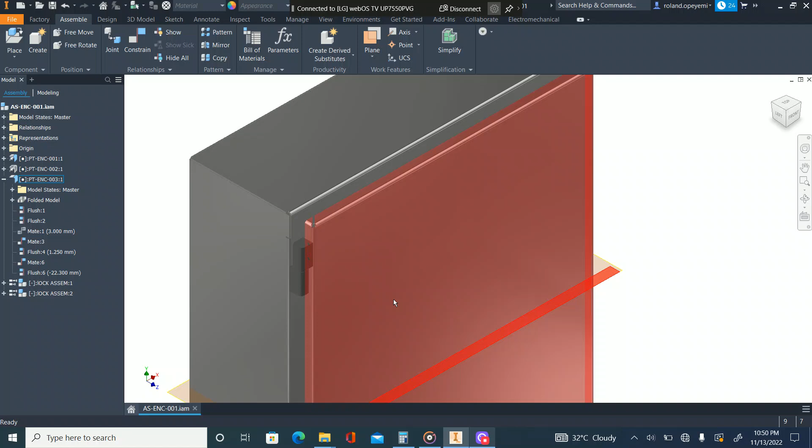The initial dimension we had, by the time I put the hinge, it was shooting out a bit, so I had to make adjustments on the main body, on the flange of the main body, to bring it further in. I'm going to measure from the end of the flange - this is about 1.5mm, 1.25mm, to make room for my choice of hinge.

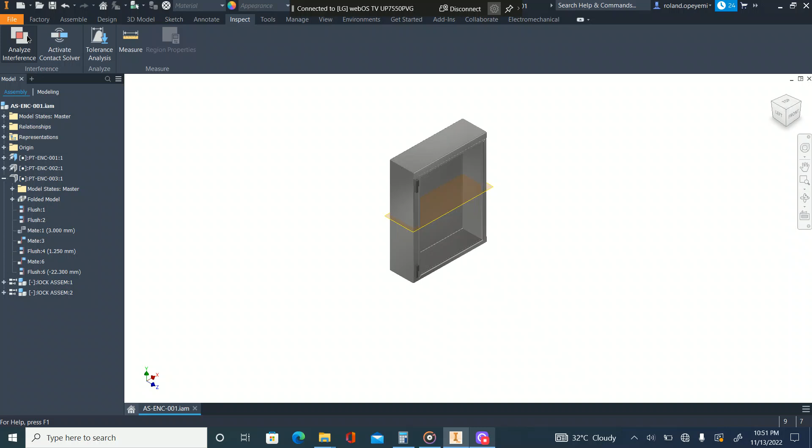Another thing we do most times is check if things clash. So to avoid clashing, we might need to make those tolerances, and that's what we did. There was no interference between the main body and the hinge and everything else, so this worked perfectly.

So I'm going to show you what changes are done. Let me just do save as for this assembly and delete what I've done, then save as 002. Alright, so this is it.

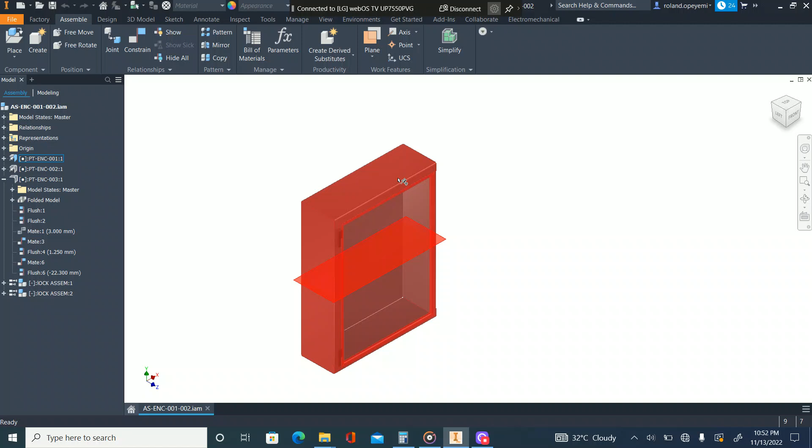So I've done the save as. Always save this and come back. So what I did was, when I want to open the main body, you're gonna see - whatever you've done so far with the previous videos is fine.

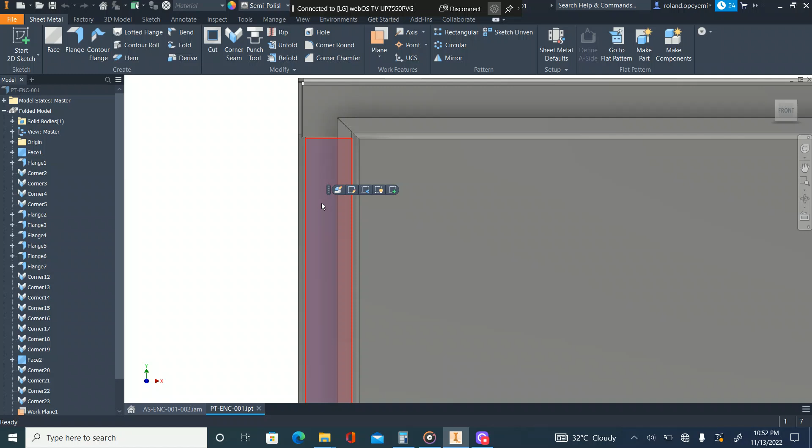The changes we've done to the main body, since we need to extend this further, I'd gone to make those changes there. So this is what I did.

I have a flange that needs to move further, so it means I need to change the flange depth of this by 3.25 - it was 30. Yeah, 3.25, because that was the clearance I had on the edge of the enclosure.

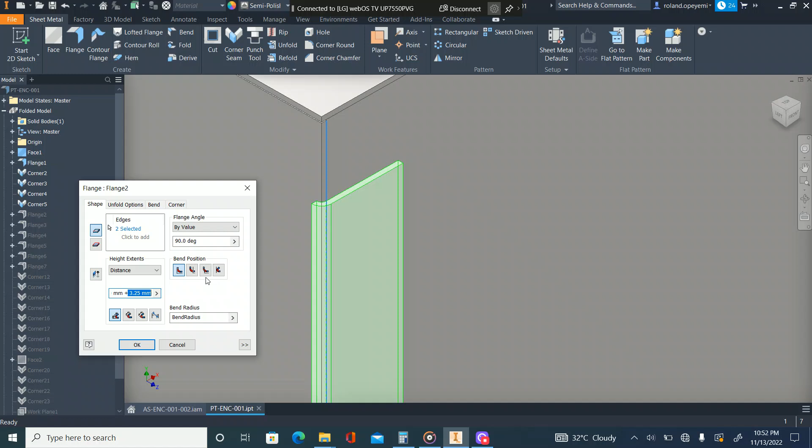So if you look at this part in your drawing, go to this main body, put 3.25. That's because I want the edge of the hinge isolated to flush with the edge of the enclosure.

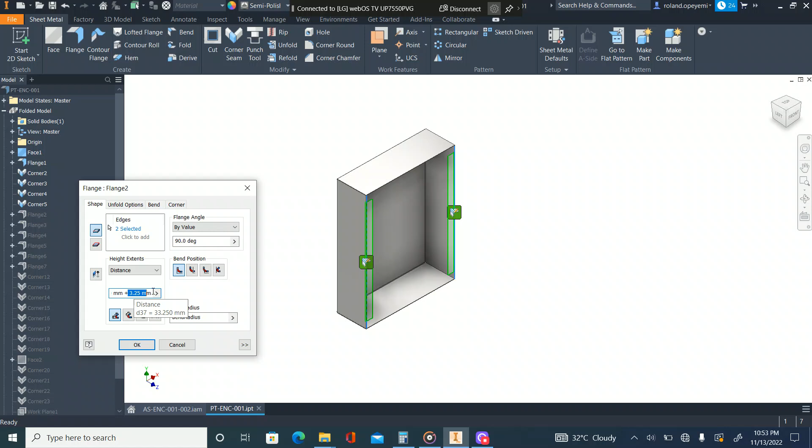So in your own, you go to 3.25, add the 30 plus 3.25, and if you come over here, I've done some things on this part.

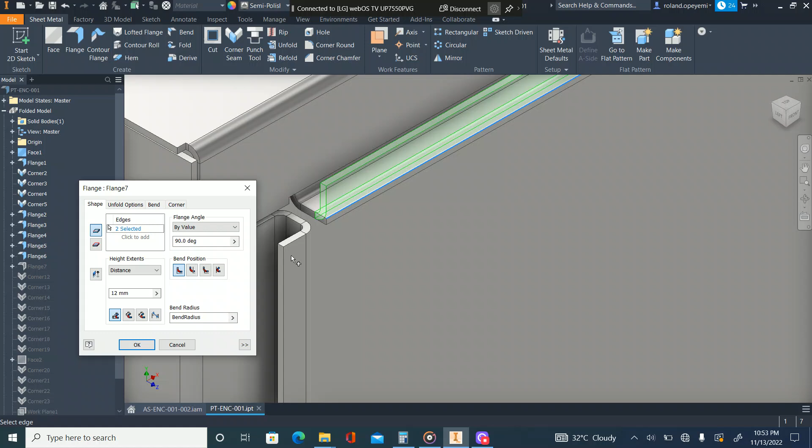So on this part, increase by 3.25. Then on this part - let me go out. On this part of the drawing of the flange, this one here, the second one is 1, 2, 3. So the second flange, or the top.

Having moved in by 3.25, it means that these are moving by 3.25 to the right and to the left. I mean both sides - to the right, my right, and this is moving in by 3.25.

Meaning that the offset we've created here, it was 30 before. So what I did was, if you hover over it, it immediately says d37, which is equivalent to the length of the flange. If you look at it, it's going to give us 33.25, which is 30 plus 3.25.

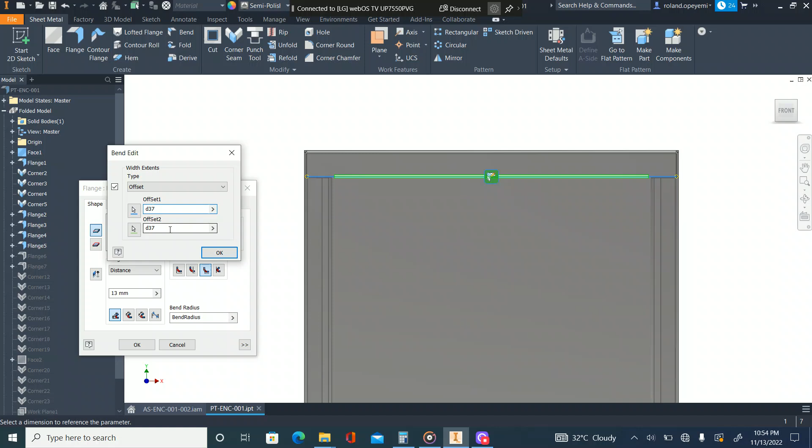So you can either write 30 plus 3.25 as it was before, or you link it to it so that whenever there are any changes on this edge, it automatically does the offset by itself and respects the tolerance we give it. So I connected it with the parameter.

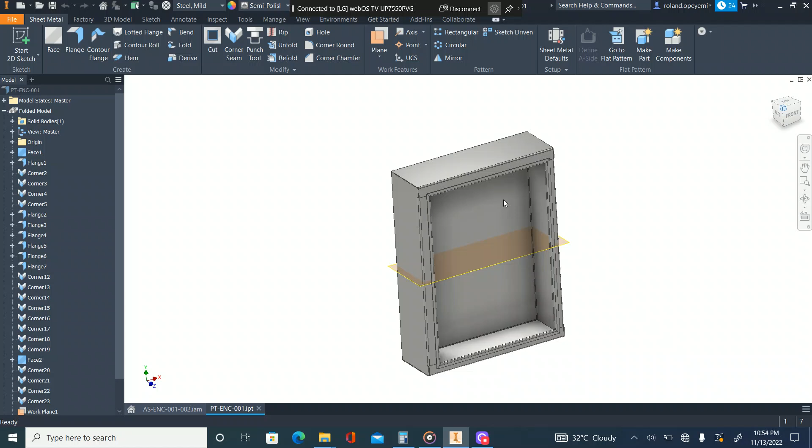So what I did was just go back to the flange and get the parameter there. If you hover over it you're gonna see D37 - that was the same parameter I picked. I just picked the parameter name and plugged it into this flange.

Another constraint you might want to try and avoid when you design these things - all of these things, you might want to find out if your manufacturers can achieve them.

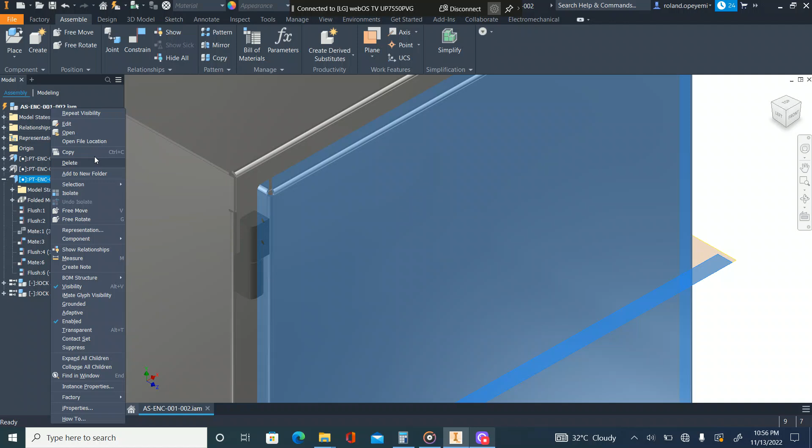I increased the distance from the edge - before it was about, I'm not quite sure, but I'm gonna find out now. So what I added was width minus 20, which is 450... let's check the parameter because I can't remember what the width is.

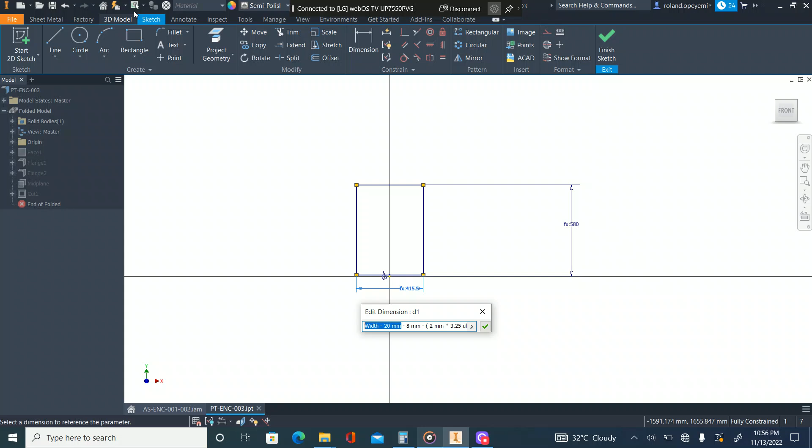So I need to stop this, I need to pull out the parameter. I mean, this stuff is covering it. I could move it to check the FX.

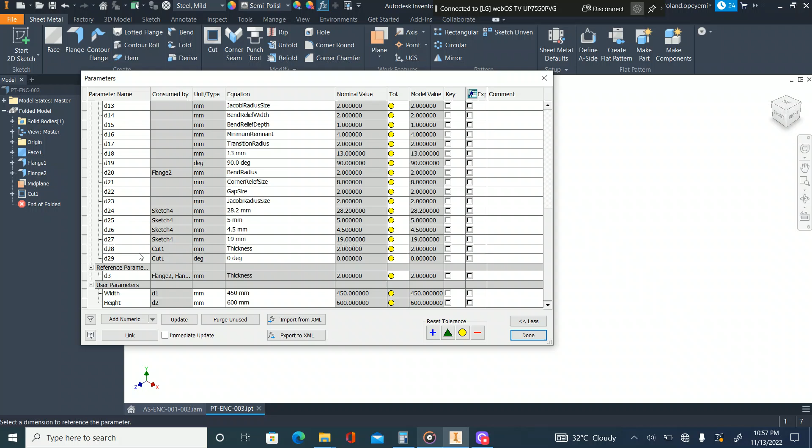So I could go to manage the parameter. The width is my user parameter - width is 450. So 450 minus 20, that's 430. So the width we had was 430.

Clearance of about 430. That was clearance of about 10 on both ends, which is 450 minus 20. That's 10 on both ends. And now rather than 10, what we did was to make room for this edge.

I need to also give a tolerance between the end of the door and the interior flange face of the door, and the flange on the enclosure. So what I did was I had to do some calculation.

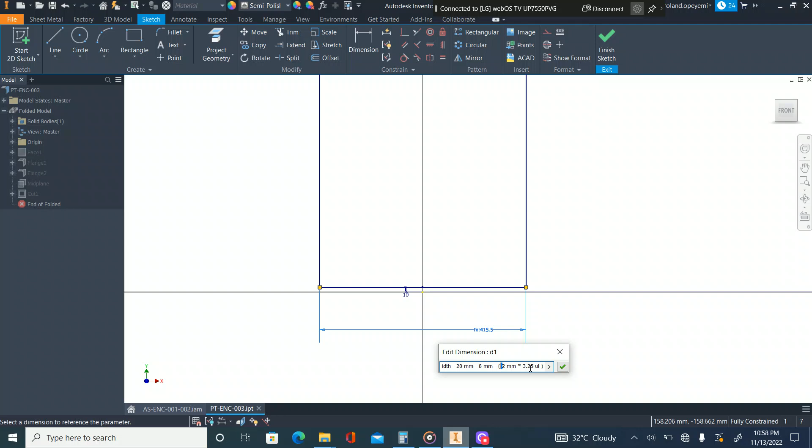I need to subtract 8, that's 4 on both sides, minus another 3.25 on both sides to accommodate the hinge that I put there. So this is just specifying the hinge, so which is what I've done.

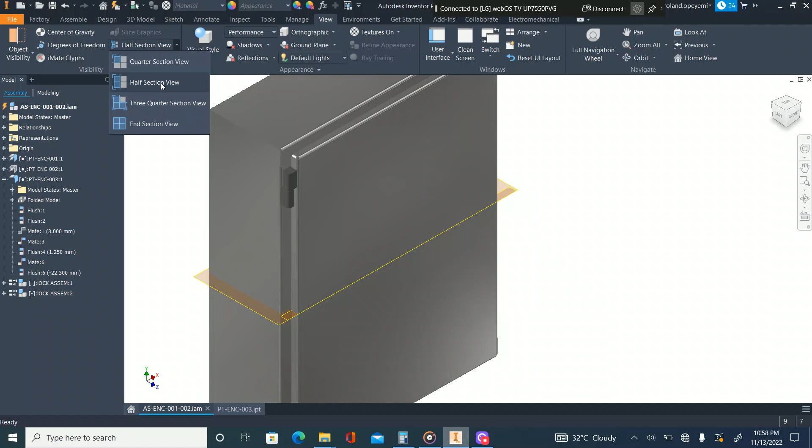So if I slice it, just like I told you, I'm gonna slice it. Go to view, slice, half section on the right side, just to see.

If you see this wall I'm talking about, this face and the internal face of the door. Sometimes you need to be conscious. If you want to use rubber, you keep tolerance. If you don't want to, in most cases you might not need rubber if the clearance is okay.

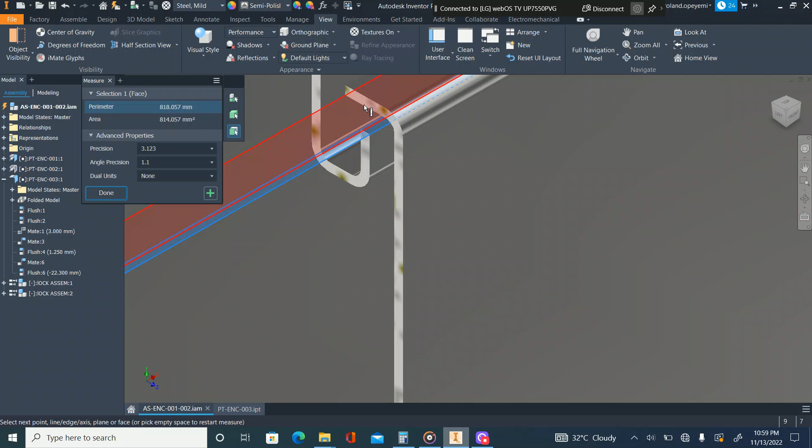You see the distance between the interior faces is 5 mm from the top, so I could bring it further in case if I won't need it. Because why we did this opening here is water ingress. If it rains, the water can just flow through all this gutter and it drains off. So it's like a form of drain.

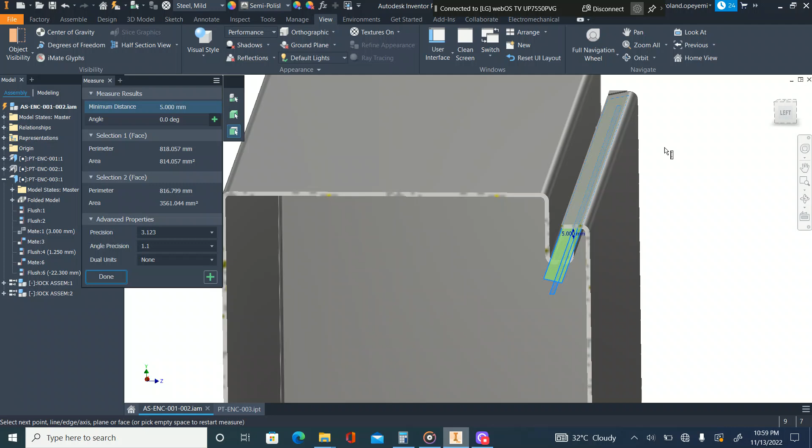For water to not get inside. So we actually don't need the rubber inside. On this, with this of the 5 mm, you might just make it 2 mm, something close, or you want it to be something extremely tight.

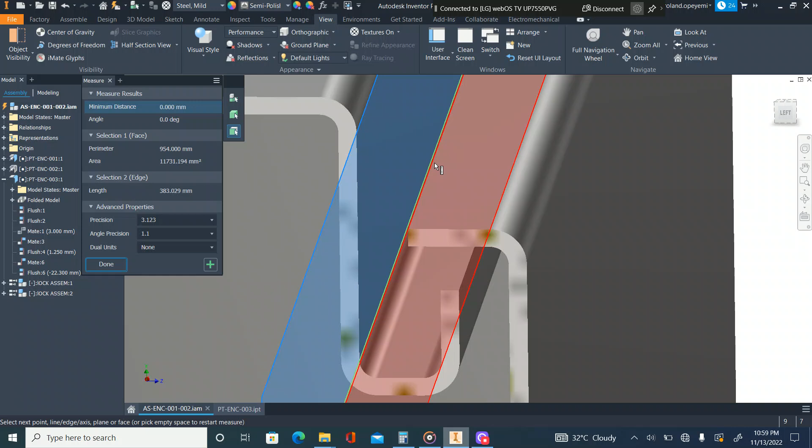Then another thing is we measure from here to here. Sometimes you want to use that. Some customers don't want enough gap. We don't want that much gap. Measure that's 5.5, which is okay. Go further, but it's okay.

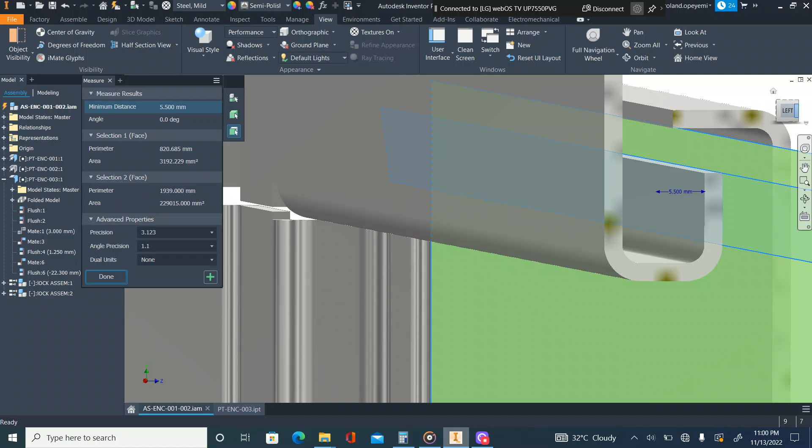5.5. So max 5. So if we're looking at from here to the face of the door, see something that's 5.5 as well. So that's what we're trying to do. Most cases, some want this thing to actually lap properly, and some people also like to put padding inside the door or insulation, stuff like that.

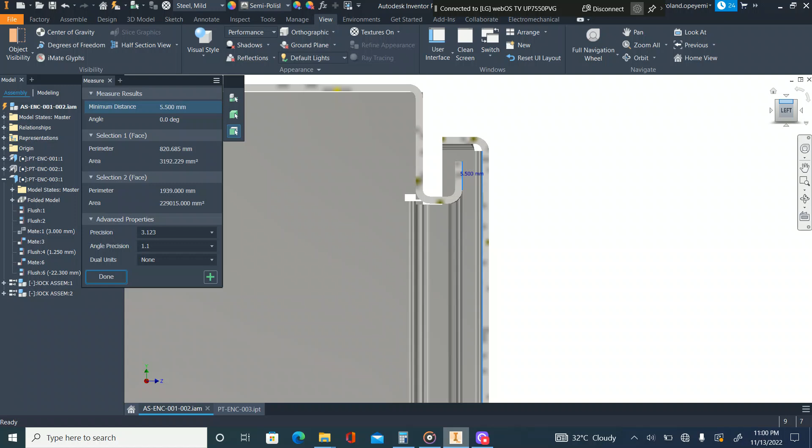So I want to leave allowances depending on the need for the enclosure, what kind of ratings the enclosure comes with. So I'm going to end the half section and do the one from the top to show you what we do for the hinge as a consideration.

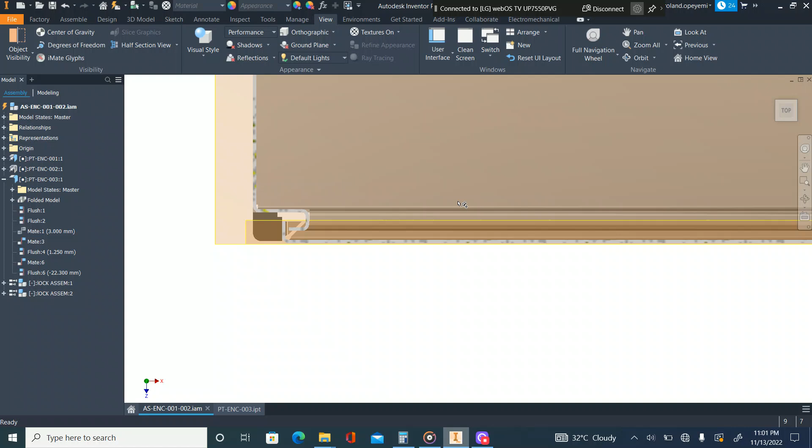In some cases, if you look at the side, the gap between the top and the side are different, and that's because we want to make room for the hinge. Look at from here to here is 17.25. So that means that's the width of the hinge we put in there.

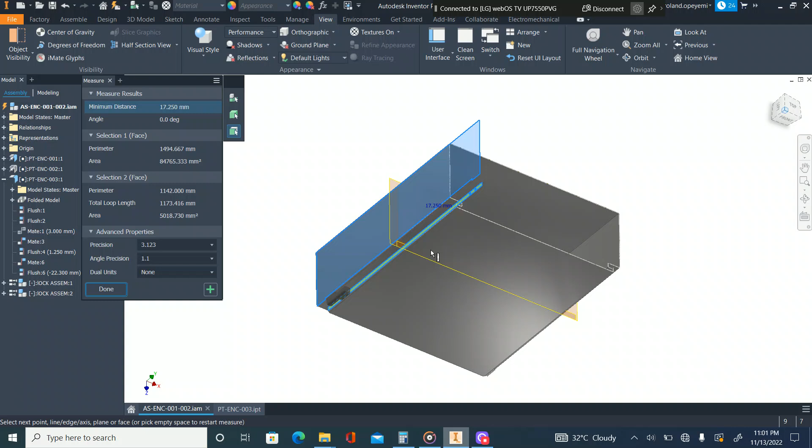And another thing we're considering is when you open this door, we don't want it to clash. Sometimes once you put the hinge, you also need to make a close and opening to make room for the tolerance. So in most cases it's best to put your hinge and test it out how it works.

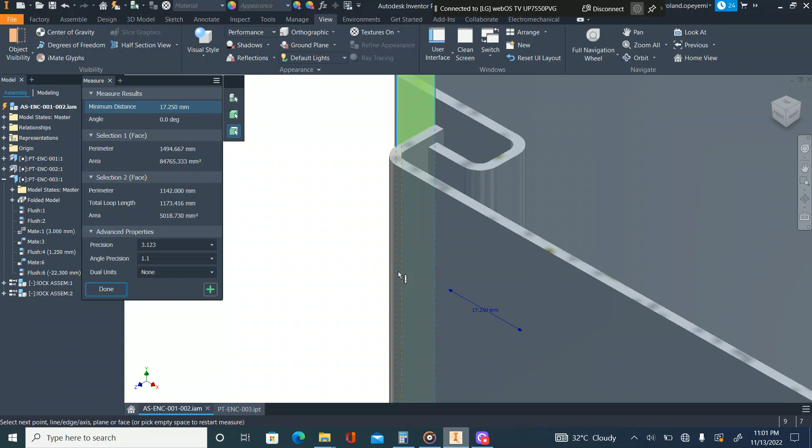So if you look at it, that's 17.25. So I want to check the distance between the interface of the hinge and the face of the flange. I mean the face of the door and the face of the flange are still just close, so tight, very tight.

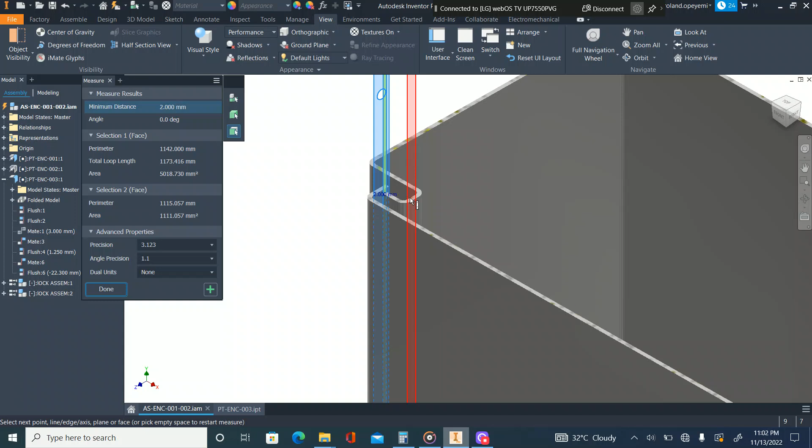Because you can increase it. If you increase it, you know that the hinge will not sit on this face again. You might need to extend this further, and want to be careful extending further because it might not be achievable, manufacturable anymore. So that's why I still want it to stay within certain minimum tolerance, or not do those things at all. You don't want your work come back for rework.

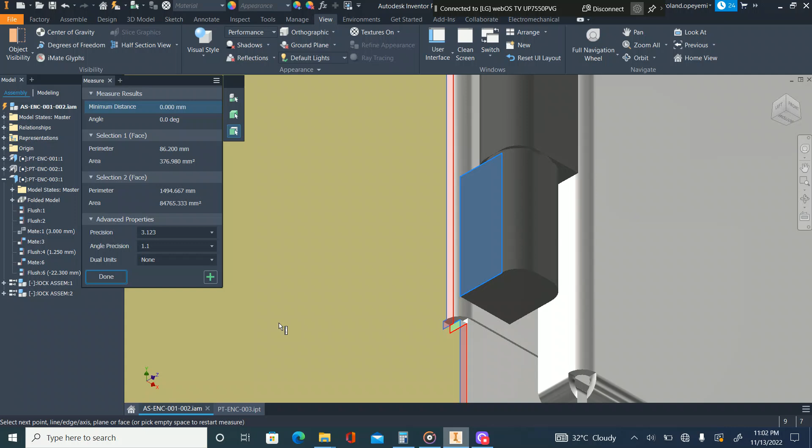So this is the hinge downwards that I've brought in here. And you measure from here to here. So it's fully flushed, and the fastening from inside to inside. So none of the fasteners is visible outside, this is what the hinge is.